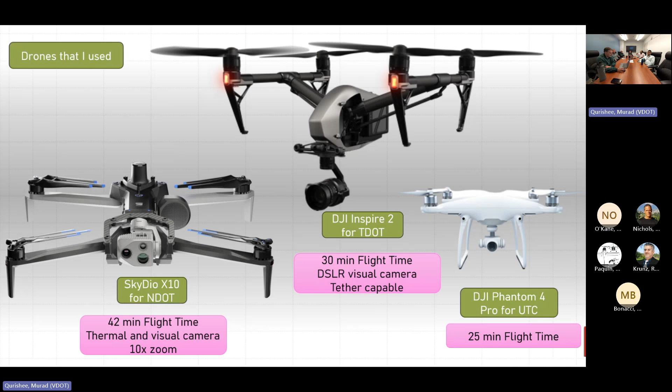We don't necessarily need to fly the drone over the traffic or crowd. We can fly the drone near to that and use the zoom.

The other drone doesn't require any pilot. It has a tether capability, also thermal, and it has a 150 foot tether cable. So in your district, if you do not have any drone pilot, you can use that.

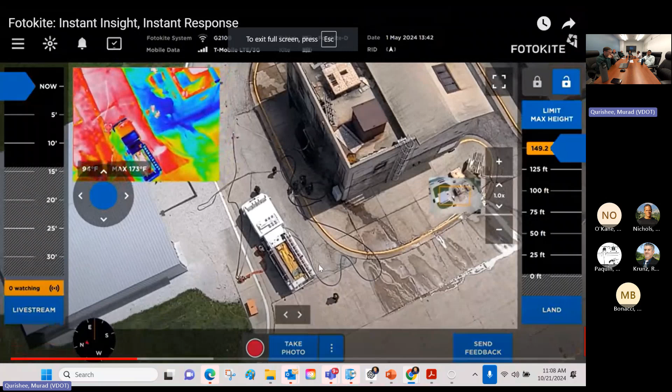Mainly in the video, you can see you put the drone here, and there's a cable. The drone can stay in the air as long as it has power. You can take the power from the car or a nearby power supply. The good thing is the drone is lightweight, so it doesn't require a pilot, and it has automatic flight and height control. So for a district office without a drone pilot, we can use that one.

The next one is ramp service interchange queue length monitoring and advanced detector placement. This is on I-24 interstate, where the traffic comes to an intersection. During peak hours, traffic blocks and there's a very long queue overspill. So we fly the drone to check how long the queue is, and based on that, we put the advanced detector so it can call with the controller and clear the traffic.

At what height were you flying the drone? The maximum height we can go is 400 feet. So I was flying here, and you can see there's a long queue. They are waiting, and during peak hours there's always a queue still.

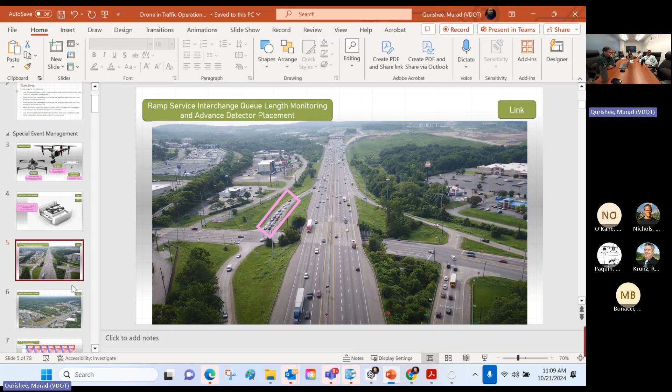The next one is traffic progression analysis along a corridor. So we retimed a corridor, and after the retiming, I flew the drone to try to see how the traffic is progressing.

Is there any blocking issue? Like this is another signal, and there's another signal, and another signal. You can see there is some blocking here.

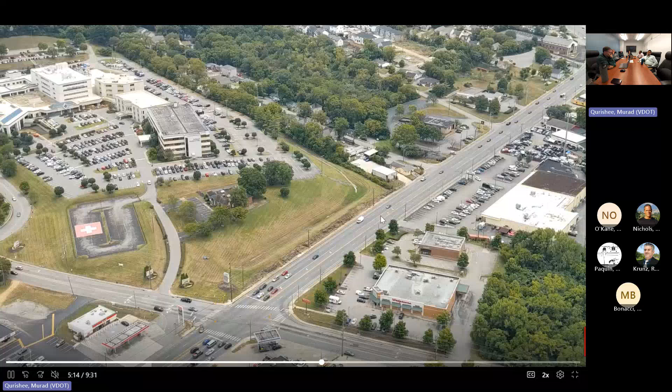So we talked with our consultant and gave them the video footage. The interesting thing is this is a major intersection, meaning this is a major arterial and this is another major arterial, so it's hard to coordinate.

Our consultant came up with a signal cycle length increment every third cycle, like a 50% time increment. For example, if we take 50 seconds for the first cycle, the next time it will be 100 seconds, and the next time 150 seconds. It will go on like that.

It will give the adjustment on both corridors, and from there you can also see we can use the drone for queue length assessment.

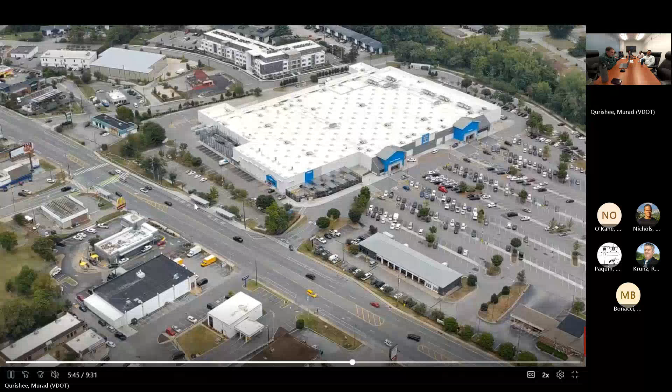Hey Murad, I think Keith's got his hand raised. I'm not sure if you can see it since you've got the presentation up. Go ahead, Keith. No, that's okay, keep going, I'll wait till the end. I didn't want to interject in the flow, so I'm sorry.

So I'm mainly observing how our signal retiming and any of the split adjustments are required.

This is another corridor here. You can see from here, trying to observe the traffic flow, and there is a queue here. So we talked with our consultant to check that queue, because the minor approach has very minor traffic there.

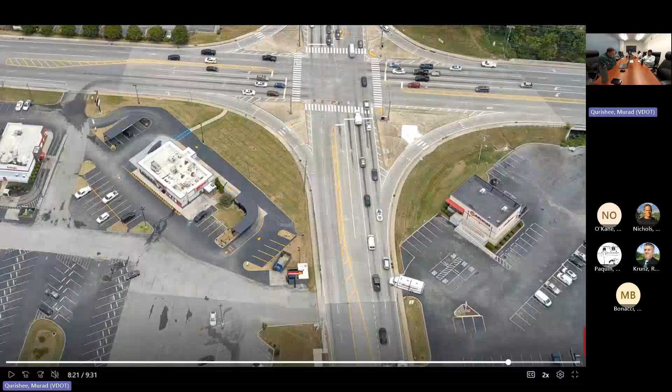Now, is this drone tethered or not? It's not tethered. Okay.

Keith, are you familiar with this? There was an experiment done several years back, prior to COVID. I remember going to see it, it was in Salem. Yeah, I'm very familiar with that whole thing and how it played out, and all the little nuances of what worked and didn't work.

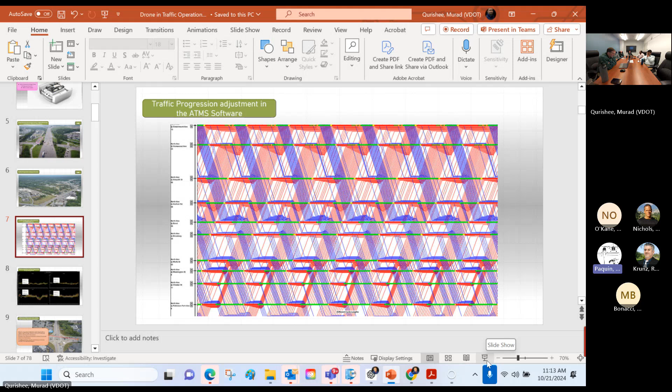This lines up great because I'm on my way to Massachusetts today to talk about this type of drones, and drones in general, with Massachusetts DOT. When I come back, they've done 5 or 6 drone traffic operations studies that kind of continued what we did earlier, either added on or branched off for drones and traffic ops.

I've seen that, 2019, I think it got published in 2019. Okay, that sounds about right. For that report, I just remember it's sitting on my desk. It was tethered.

Yeah, so the one I saw was tethered. At least the one in Salem, the way they did it, I was actually impressed with it, but I don't remember the final study. I probably read it, but don't remember what their conclusions were.

Well, the big problem with that one is, and we still have that requirement, you can't just leave a tethered drone by itself. Depending on the authority you're operating under, you're still required to have a pilot. So just because you buy a tethered drone doesn't mean the requirement to have a pilot goes away. That's kind of a big misnomer.

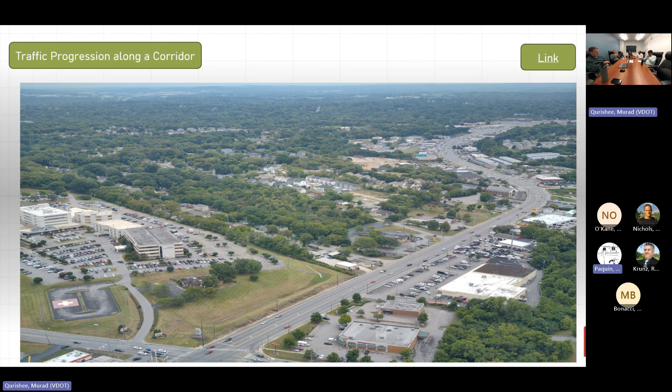I'm aware of two other studies going on in Hampton Roads, not with us. We were invited early, and I'm kind of like a tag along, if you will, on this. But I know that the police and fire down in Hampton Roads are working on getting their video feeds into the Claris system. I'll reach back out to them and see what their success rate is, so we're not duplicating effort. We might be able to fall into something that they've already done. Anyway, I'll follow up with that when I get back in town.

All right, thank you. Sorry, I have a 80 slide, and I think I need more additional time.

Okay, so after the corridor run, I checked our Centracs time-space diagram, and we adjusted different offsets where we found the blockage. After that, I used RITIS for additional data analysis. As you can see, in May 2 the speed was 10 something. In May 3 the speed increased to 16.

So it's a huge increase there, in northbound, again southbound. So although the corridor was retimed, on that major intersection it was a very hurdle for us to get through, and it's improved from there.

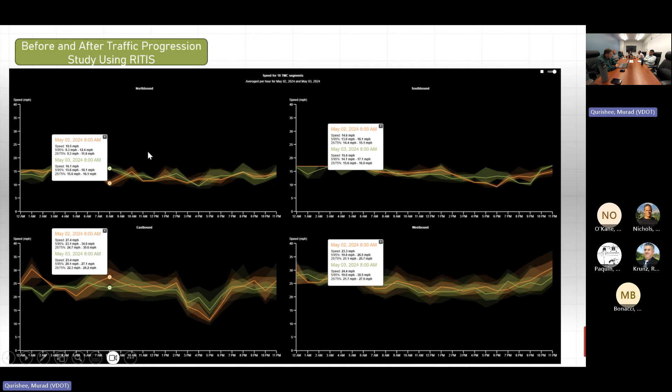And then we also did an indecision or dilemma zone study and advanced detector placement. So the general practice is that drivers usually show indecision or confusion when the yellow light change is 2.5 to 5 seconds. So we studied the corridor and put the advanced detector in a video analysis tool, and we simulated different features there.

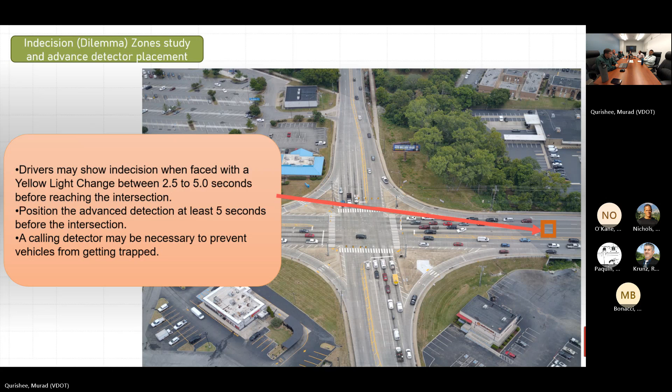And then this is the special event management. So in Nashville we have Music City, and we have a corridor called Broadway, and it gets messed up when there's something like Taylor Swift coming, and the whole city was shut down at the time. So what I did...

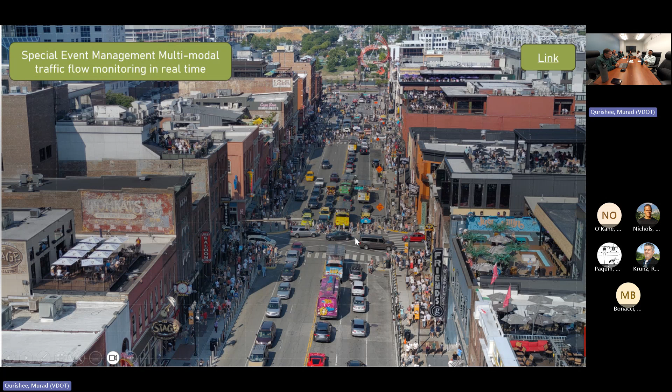So I fly the drone on there, and mainly I observe the corridor and the pedestrian, how they are crossing the intersection. Also you see there's an entertainment vehicle, so the corridor is mixed with different modes.

I mainly fly the drone to study what pedestrian gap size we need because during special events, pedestrians can come in thousands or more. How can we accommodate our pedestrian signal during that time? As you can see, people sometimes block the intersection.

The other thing is that after we capture the special event, I use a Skydio drone which also has a thermal video feature. With the thermal video, I can measure the pavement temperature. I talked with Richmond District Materials Division and they are very interested in how you can fly the drone and find real-time pavement temperature for materials testing.

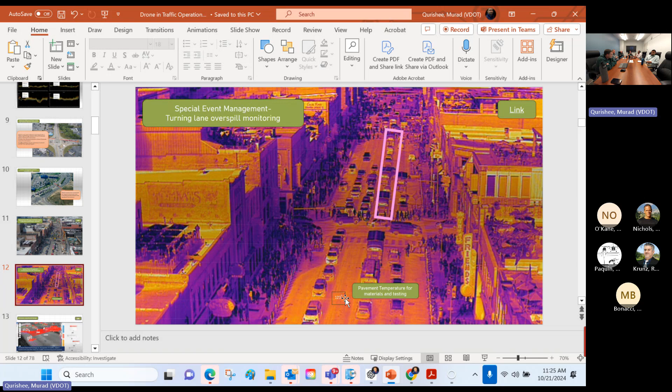Using that, you can also see that the left turn has already overspilled, and how can you adjust your signal timing to clear that? I have the video.

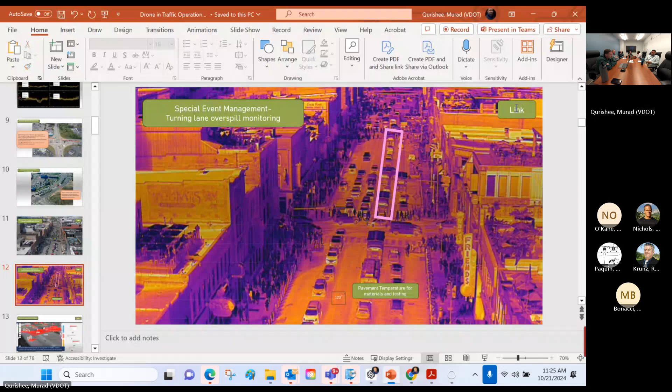The good thing is that using thermal video, if you use different analytics tools, they can capture and count pedestrians more precisely than visual methods, because thermal avoids shadows and can detect pedestrian objects more clearly than other methods.

Also, the privacy for the individual person is not disclosed, so we can use thermal if there are any concerns or privacy issues.

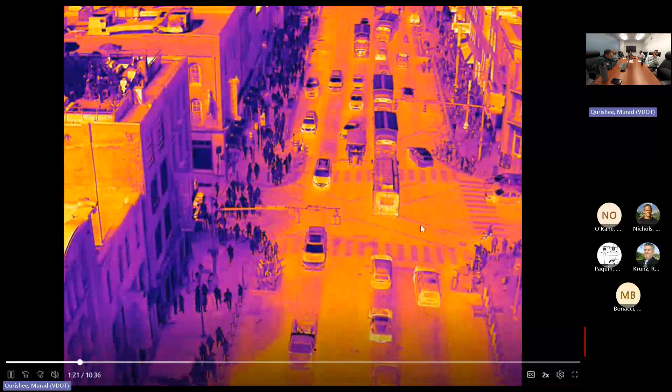There are some council members in here, so they don't want it shown that they're drinking or having some fun. Yeah, we can use that thermal video for that.

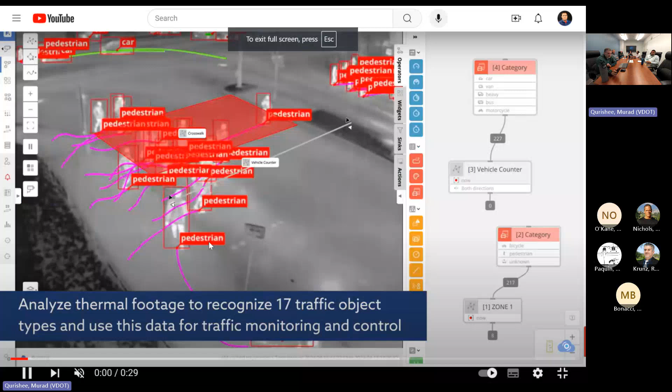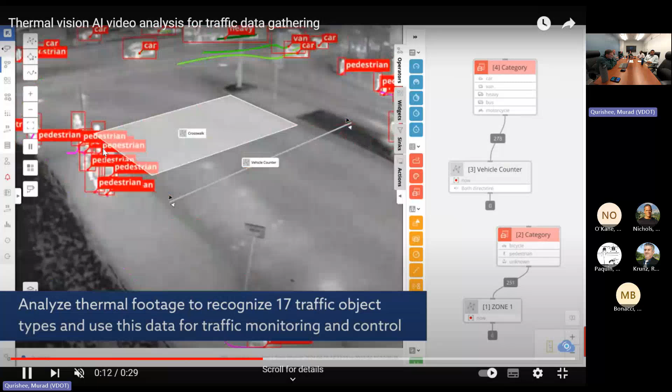We use a tool called Data from Sky. Using that, it gives us pedestrian flow data from the thermal camera, showing different pedestrian flow patterns, how they're crossing, and number of pedestrians. They have nice tools they provide in the setup.

Again, I use the drone for special event coordination with the police department. You can see the police in here. We share the feed with the police department, our TMC, our higher leadership, and also the mayor's office.

The mayor's office also observed that. They try to understand how many people come and try to adopt different measures. Police come in here and saw that this intersection is affected because we have one zone nearby that intersection.

I don't know if anybody else has seen this policy, but what came out of 2019 was our policy to support Virginia State Police. We're extremely limited about what we can and can't share coming from a drone with VSP. We're supporting VSP.

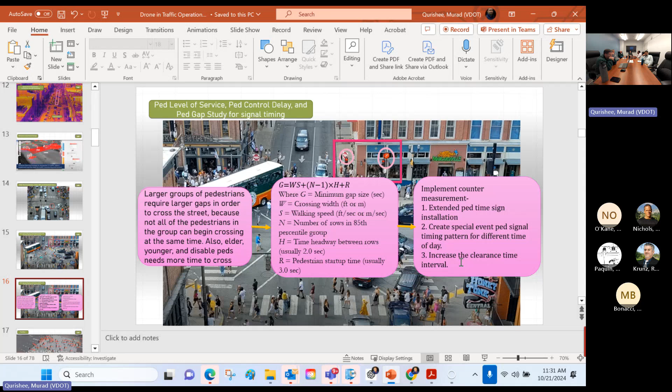Assuming you ran exclusive peds there, right? Yeah, exclusive ped, the X.

Again, as you can see in here, this is red right now, and when the pedestrian crosses, there will be no right turn on red.

The issue is that we set up a special pattern for pedestrians, but when there are lots of pedestrians or they purchase more tickets, those aren't covered. Using the drone, we try to count pedestrians and determine how much signal timing or pedestrian timing we need to implement. You can see in here, and they just cross in different ways.

You're blocking the chat. That looks like New York.

How many pedestrians an hour were you guys calculating through these? Yeah, I'm counting that on the next slide.

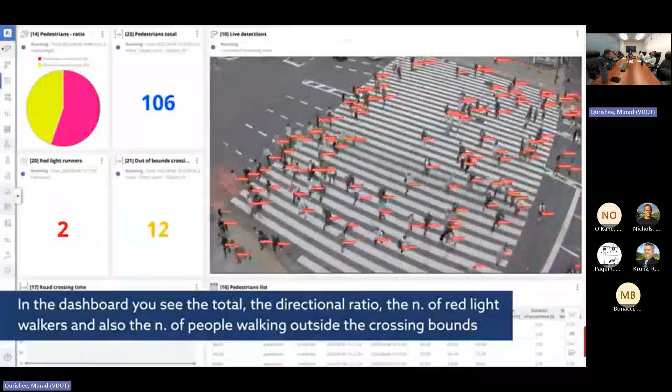So the next one is the pedestrian count using the data from Sky. When you put the video in there, data from Sky, it can count, and it also gives the pedestrian flow rate. That means per hour, how many pedestrians are going, or every 15 minutes, what is the pedestrian peak flow, so that you can count different pedestrian timing.

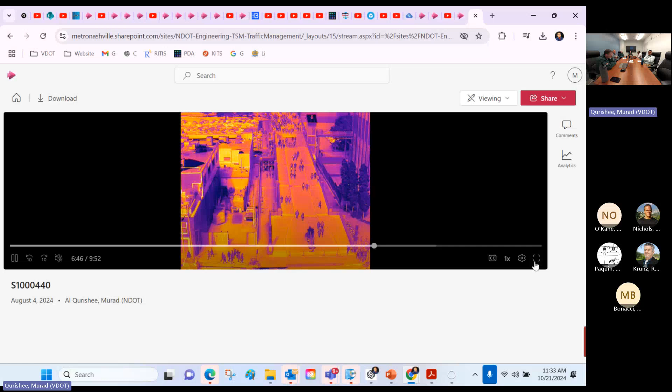And again, we also have what's called a pedestrian bridge, near the Nissan Stadium. When there is a special event happening, it's like a zombie, they are coming from different directions. You can see from there, the stadium is on that direction.

So we have mid-block crossings here, and pedestrians are crossing there, and this is the traffic. We use the drone to count how many pedestrians are using it, and in that way we know how many people attended there. So we just try to monitor different access points of that special event.

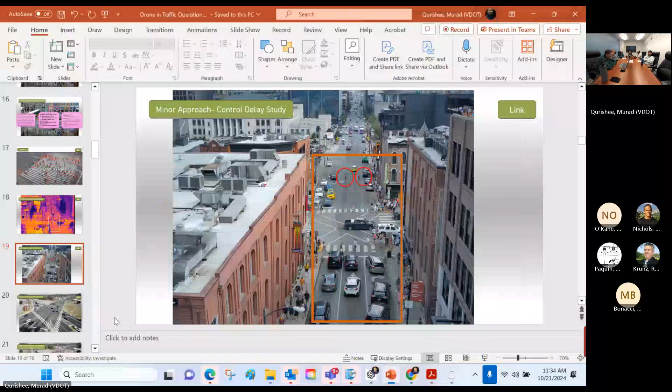The other one is control delay and turning movement count, TMC count, in there. You can see there is a rail track in there. This is the major corridor, and we need to know railroad preemption timing - if the rail is going this way, how the traffic overspills from other intersections upstream and downstream, and how the queue length is affecting our signal operations.

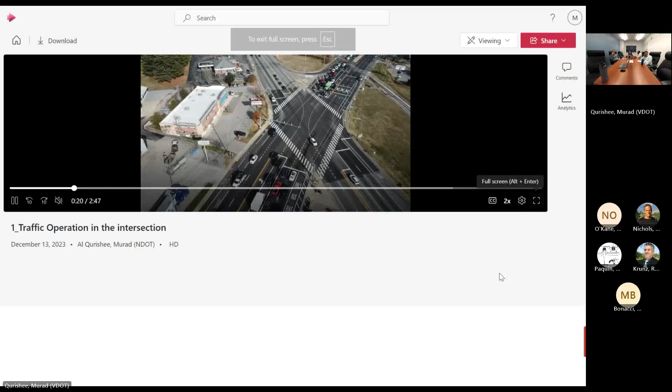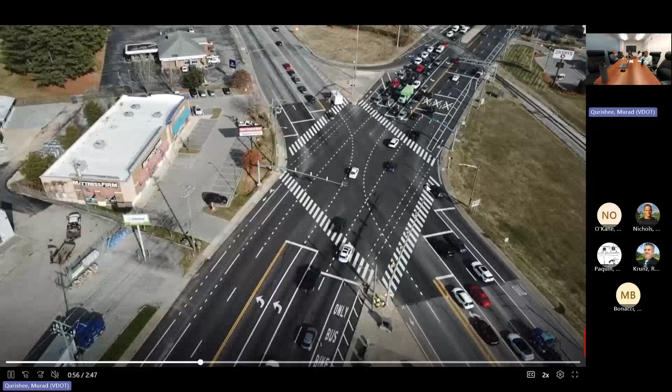You can see the queue length and the traffic in there. So people are taking left turns, and we are using video analysis to count all the turning movements here.

Also we see the rail track - unfortunately I'm not seeing it here, but using that, we can also see railroad preemptions, when the rail passes, how it is impacting other intersections, what is the queue length, and in that way you can know which phase after the rail pass should be released to minimize the queue.

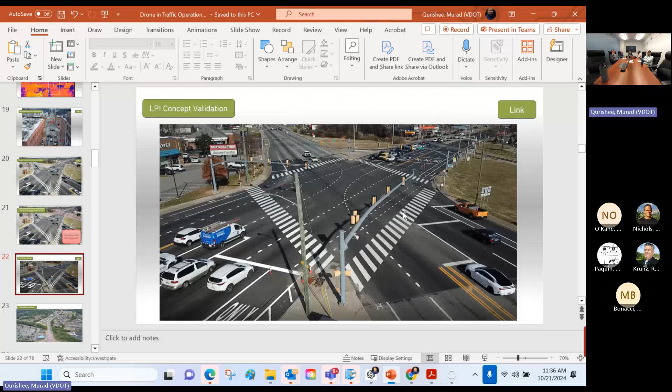And then same with this one, and also during NPI implementation we also implemented LPI, leading pedestrian interval. So after implementation, I applied the drone to try to capture how we implemented it, in a good way or bad way. So I found that when people - this right turner, you see - although it is red, they feel that they can move in there.

So this pedestrian is waiting to cross. When he starts walking, you will see that this car almost thought that he could cross, so he had to brake hard. If it is during nighttime with low visibility, especially if you have rain, LPI could sometimes be dangerous. So what we posted here is a no right turn on red sign. That's a good indication.

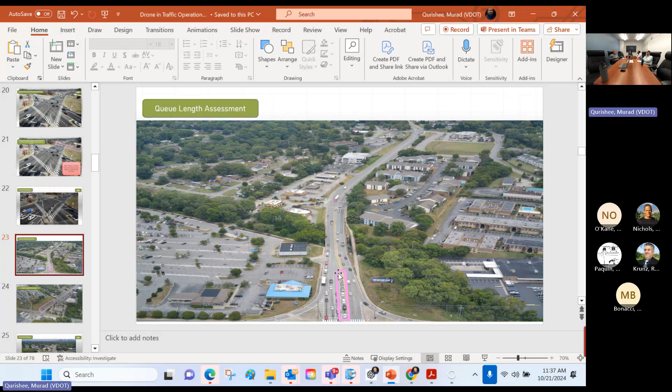And then again, queue length management assessment. We study different overspill queue lengths on the corridor. Similarly for this one, and we also know how many vehicles are there.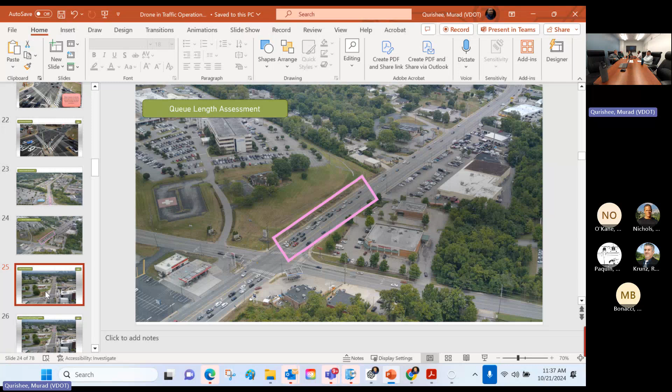And then we also did LiDAR installation, 12 LiDAR units. There was a fatal crash at that location during midnight - drunk people were crossing, there is a store in here, so they crossed and got hit and were killed.

I used the drone to fly the whole corridor and tried to capture different condition diagrams for crash assessment. Condition diagram is what traffic signs and infrastructure are there, and it helps to identify the crash reason.

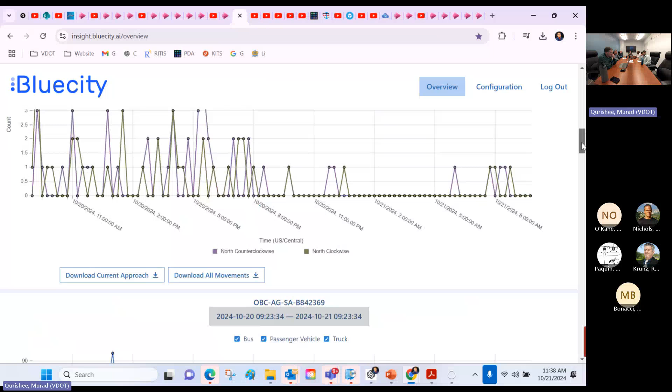And then after that, we used Bluecity, the LiDAR software. Bluecity, we analyze the data at that location - here is the location. Using Bluecity we count how many traffics are there and what are the outside-of-crosswalk events happening, meaning the number of pedestrians that are not using the crosswalk, they are using mid-block.

For one month of data, we found out that most of the pedestrians are crossing this way because there is the facility in here, and this way.

So later, I was the project manager. We installed the mid-block here with appropriate signage and a rapid flashing beacon. So when LiDAR detects a pedestrian, it gives the flashing so the driver can be aware of that. So that's another way we can use the drone for condition assessment.

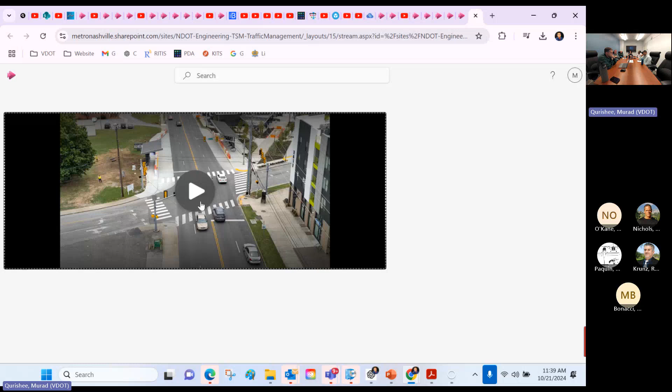Also, we use a drone for LiDAR data accuracy validation. So here I'm flying the drone here, and the LiDAR is in here.

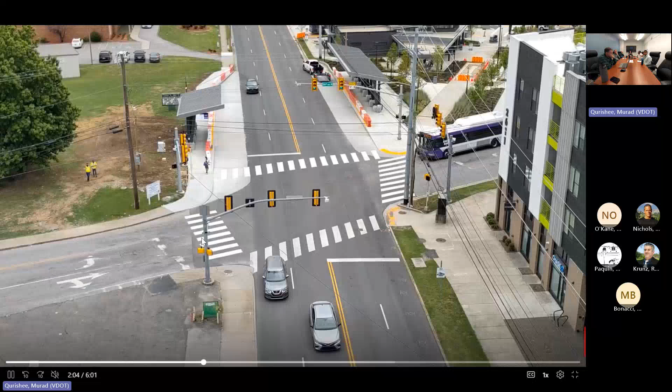So the pedestrian is crossing here, and the LiDAR is in here and here, and you can see there is a flasher. When the pedestrian touches the crosswalk, the LiDAR detects the pedestrian and starts activating the flasher here. You can see the flasher turn on and start flashing on both sides.

We also use that video and match the timestamp with the LiDAR output and drone output to validate the data accuracy. The signal was green during that time, when the pedestrian crossed the signal was green, but only the flasher is going on, so we need to check on that.

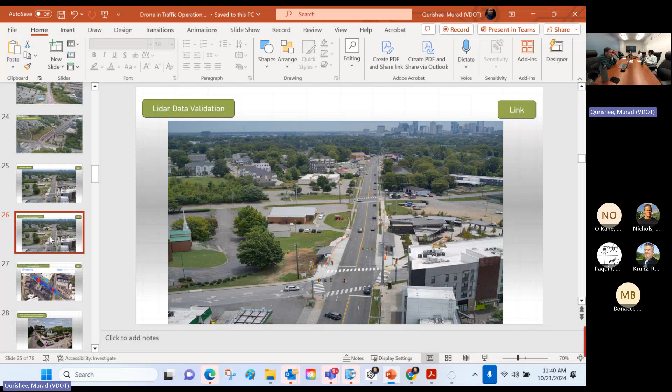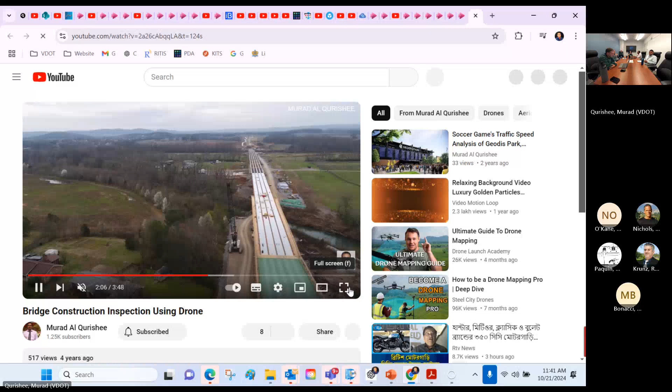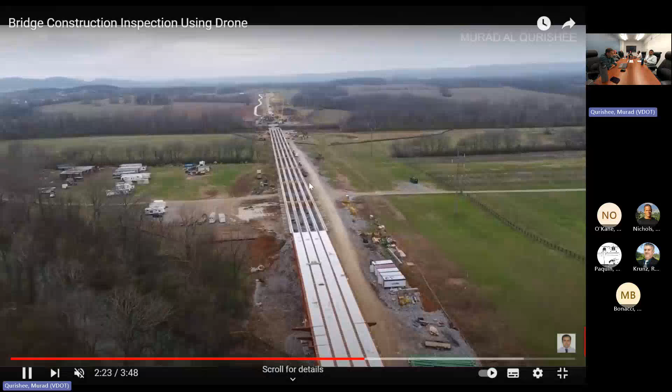This one is the construction project update. I used the drone for the TDOT public department. Mainly the commissioner wants an update on the bridge construction, what is happening there. I fly the drone and give nice footage so they know the construction status. This can be done every week, I can take a flight weekly or monthly so they can get updated on how long the bridge is.

This one is also interesting. We used the drone for I-24 camera installation, so you'll see me here.

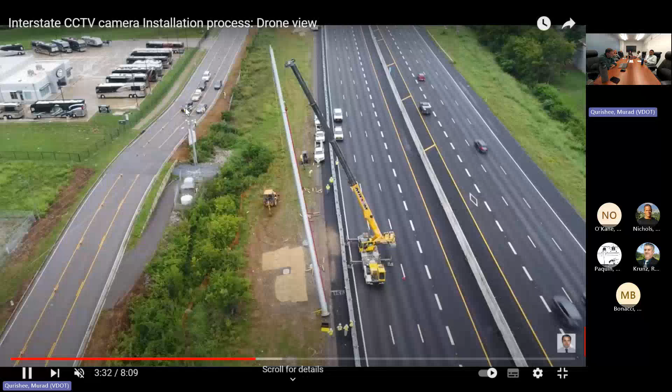When we put the crane here, we closed 2 lanes, and when we started putting this camera pole in, we closed the whole lane. On the downside of that road, there's police on there, they shut down the road. So we use the drone to share the feed with them so they know when construction starts, they shut down 4 lanes, and it gives a good understanding of when we should shut down 4 lanes or 2 lanes, so that it minimizes user delay cost.

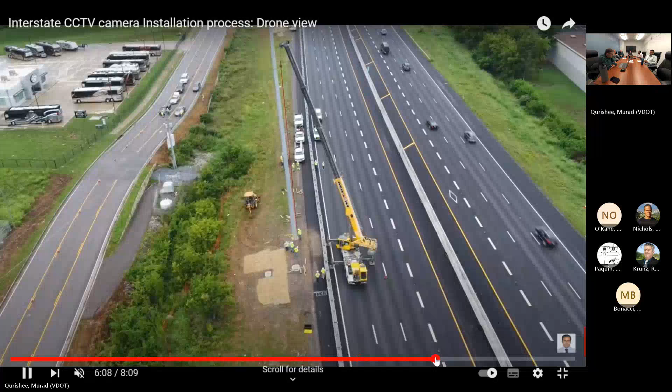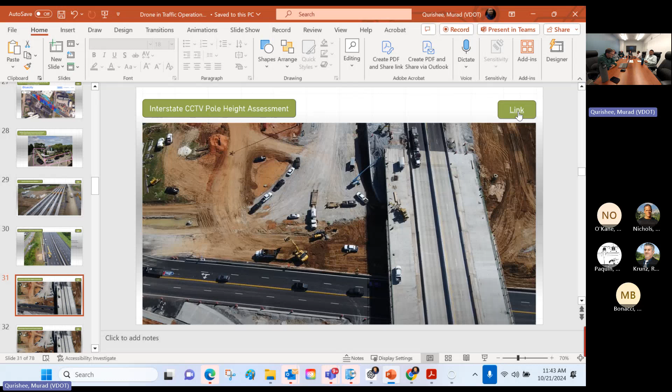Next one is the interstate CCTV pole height assessment. I did it for VDOT. Before installing CCTV, we try to understand which height is suitable for the CCTV - is it 80 feet, 60 feet, or something else.

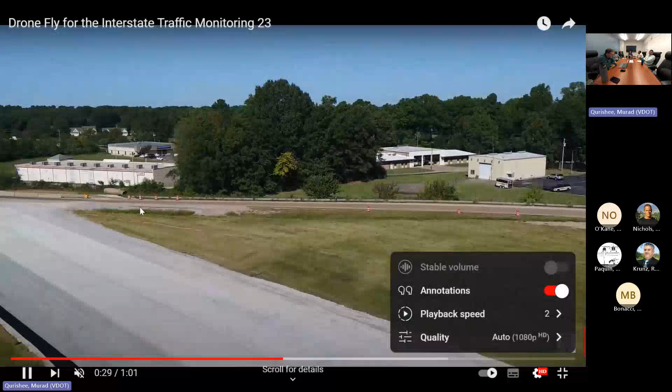Or if we choose some location, if there are any nearby signs or trees that block our view, so we give an assessment of what coverage we'd get if we put the CCTV here, looking at the roadway, minor street, and interstate. So you fly the drone at the approximate location of where the 80 feet CCTV would be, and then adjust it to see. So at 80 feet, 60 feet, 100 feet, we try to see what the coverage is.

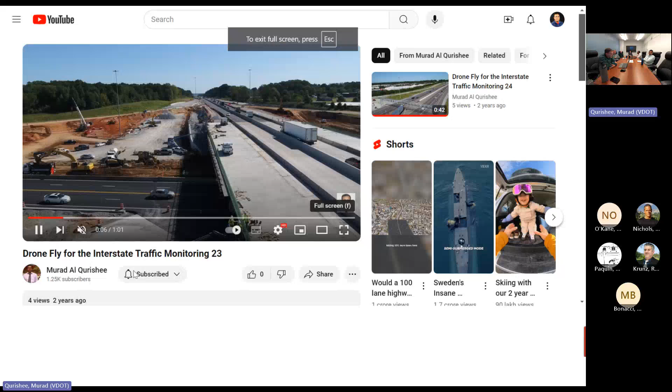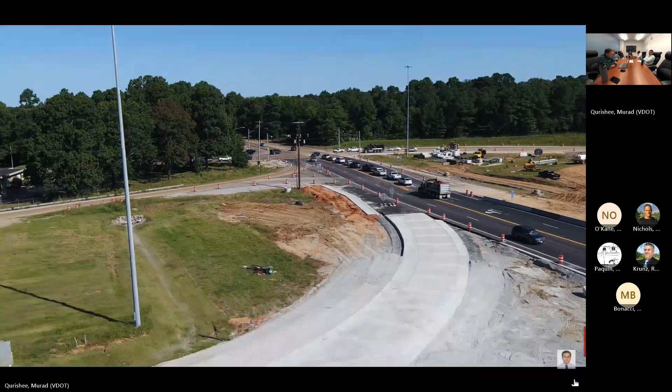Again, you see there's construction happening there, so we captured the construction and did some Streetlight traffic analysis on how it's impacting. There's an intersection here, so we looked at how it's impacting there, there's a long queue, so we did that with Streetlight.

Using Streetlight, we did a deep dive analysis on how the work zone impacted our traffic operations and what the speed of traffic was, and we can validate that with the drone data. We also made a 3D drone mapping for that construction zone to analyze it further.

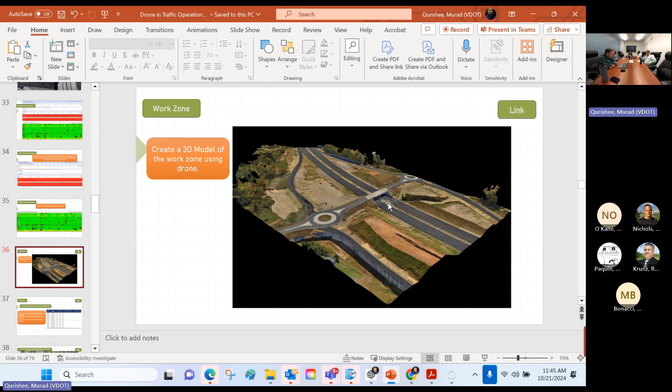This is the 3D drone map for that work zone. Using that 3D drone map, you can measure any types of pavement characteristics, different taper lengths, what the merging taper or shifting taper or different properties of the work zone are.

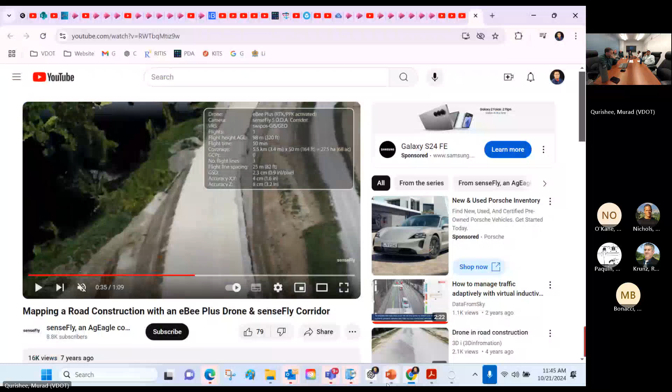Using the 3D model, we also did some experimental volume input into the VISTRO VISSIM model. Using different scenarios, we created scenarios for traffic on that work zone, like 30% trucks, 15% trucks, 5% trucks, and analyzed it at different times of day, trying to identify, because of the work zone, what is the worst or good traffic signal management there.

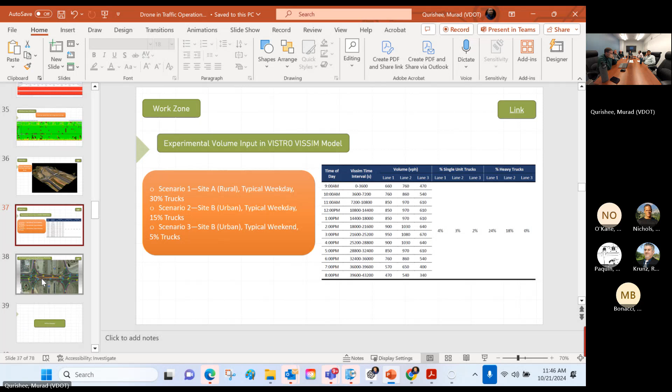This next one I didn't do, but it's mainly about the DDI - you can monitor the DDI signal, traffic signal, and traffic queue length on the DDI. It mainly shows, if there's a signal here and here, how can you operate it, how can you manage different queue lengths. Having drone footage gives you a better understanding to operate the DDI. I think the Salem district has one DDI - yeah, we have several across the state.

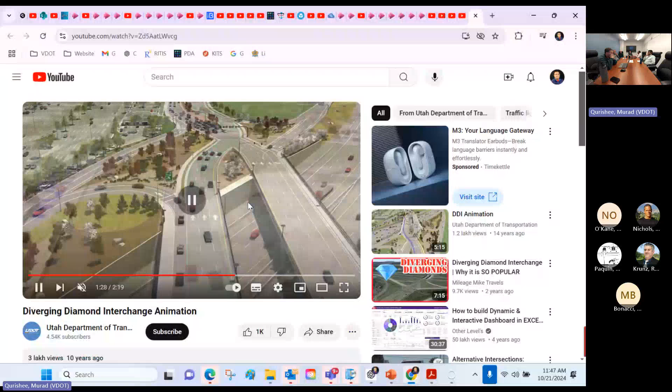And then 3D drone mapping again - using that drone, we can also go for accident reconstruction with the 3D mapping.

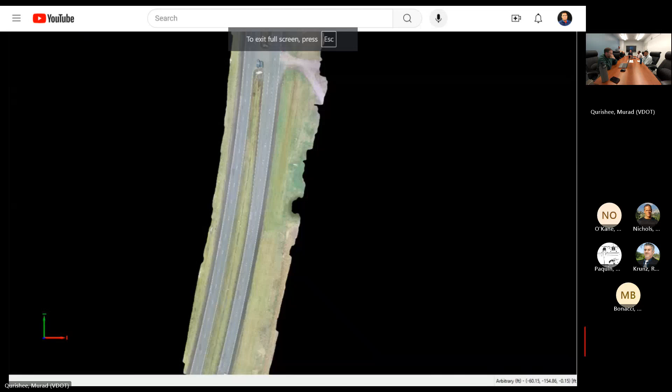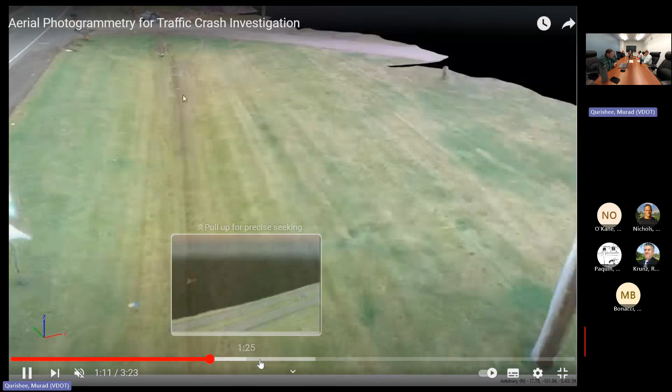So using the 3D map, you can investigate the accident and you have the ability to measure different features of the crash, like nearby drainage facility, and why it happened.

So this is the 3D mapping there. So they try to understand what is happening, and they also share this footage with their insurance provider.

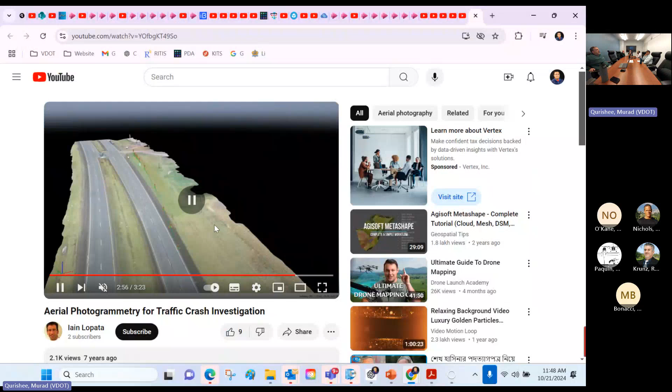Something like that may be very valuable because I assume the rest of the state still does fatal reviews. I know when I was in Salem, Brett Randolph's group would go out and review every fatal that would happen in the district. So to be able to get a shot from an aerial view of something like that would probably be very valuable.

They can use the drone, and Florida actually uses it - when I was there, they were using the drone for any lane blockage and fatal accident crashes too. So they fly the drone and see how long the queue is, and what is happening at the actual scene too. They share the feed with the TMC, so we're in the TMC and the pilot was in the field.

As of right now, we're letting the VSP handle those in the field case, and then we get the data back from them after the fact. That's not something we're actively pursuing as a case right now - we might go back and look at it after they move the car, like what our consultants are providing. But that investigation piece right now, the collection piece for the accident reconstruction, is being handled by the VSP for us.

Yeah, so using the drone, we can monitor the hazmat overspill and how the queue is forming near the interstate, and based on that, we can do the signal timing to clear the queue.

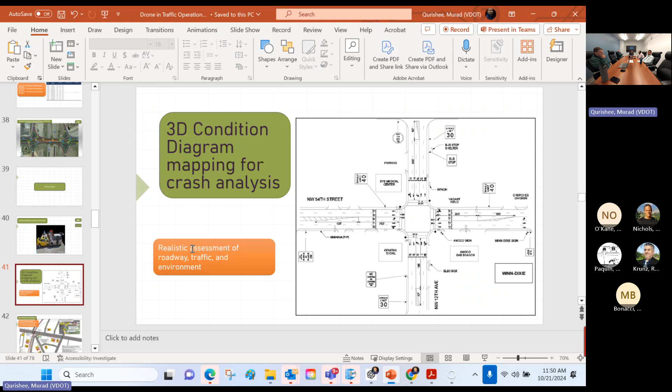And then again, using the drone, we can do the condition diagram for crash assessment. This gives us a realistic assessment of roadway, traffic, and environment.

And then if there is a railroad, a work zone, and a pedestrian facility, using the drone you can study the full corridor and understand different complex scenarios. Like this is a really complex scenario - if rail is coming in there and there's construction, this is the worst case. So using that, you can fly the drone and see how it can impact operations.

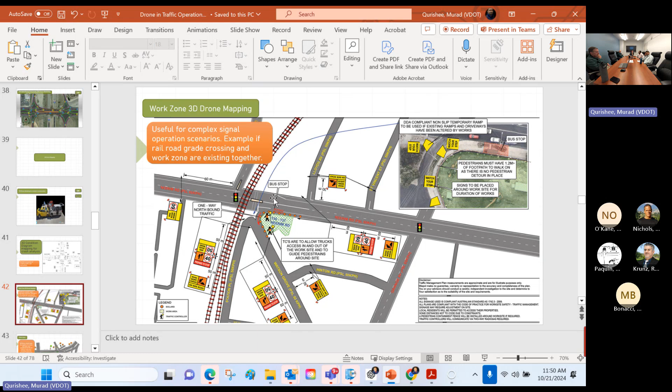And then also for the work zone, we can make 3D drone mapping and analyze different taper lengths - where we need to place it and how it's impacting our traffic operations. Again, for the work zone, we can estimate downstream taper, shifting taper, like 45 feet, and we can validate queue length impact.

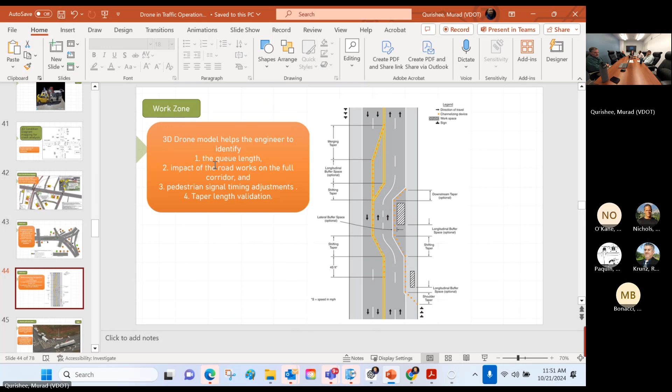All right, so the other one is Data from Sky. It's really good for data analysis, and actually VDOT bought one unit last year. Mr. Ray Gire and John Paul, they have their tools. The good thing is these tools give us real-time data, and it has data capability - also I think a generator unit in there.

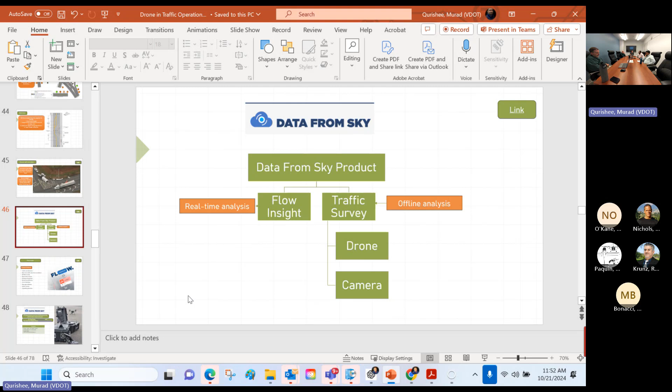So Data from Sky has two products, one for real time, another for offline. The real time product is called Flow Insight, and the offline one is called Traffic Survey. Using the traffic survey, you can put in drone video or video from any camera. Their product features include jam detection, real-time traffic data, roundabout and origin-destination study, safety study, parking management study, wrong way detection, U-turn detection, stop sign violation, and jaywalking detection.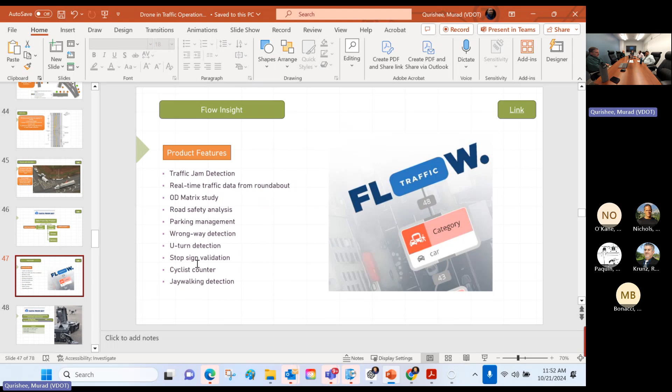It's a lot. So I put together a different slide on how we can use Data from Sky for our signal split adjustment. I have a video, but I think I don't have much time.

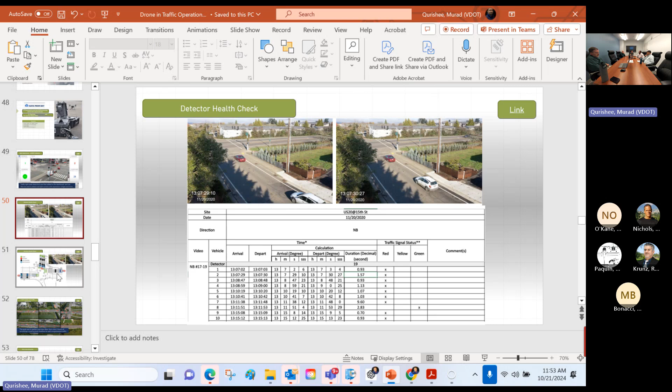Again, we can also use Data from Sky for detector health checks, like if the detector is working or not, and different detector health checks based on that - there's some report on there.

Also, using Data from Sky, they fly 6 different drones in 6 different segments of the interstate to cover a 2-mile stretch of light traffic, and they give that type of tools. We can also use Data from Sky for near miss detection.

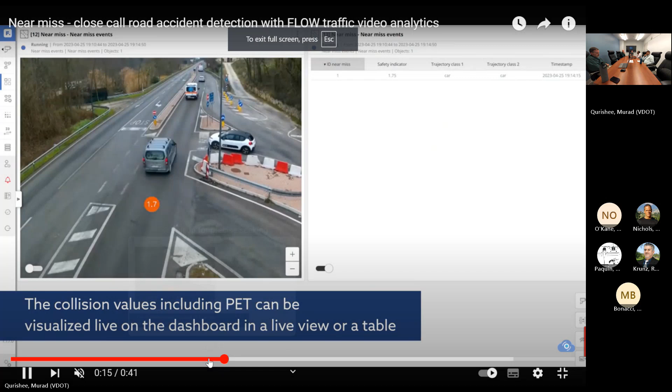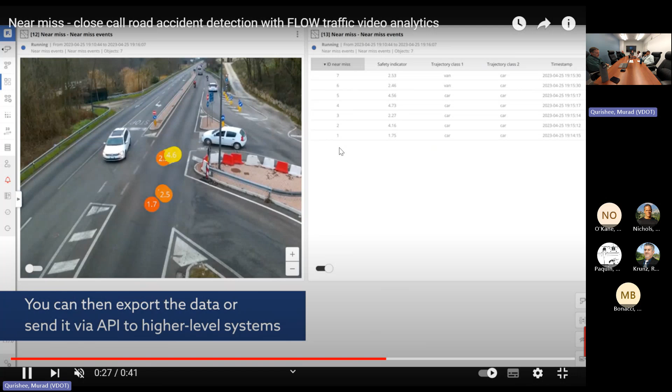So you can see that it gives some near miss detections. You need to put some kind of trajectory data on there, and it started tracking different near miss objects in the air.

And then also you can do U-turn detections. So sometimes we put no U-turn signs on our intersections, but people do not obey. We can also see how many violations are occurring and how we can minimize it. Their platform gives different information - you can draw trajectory data, different gates, recorded gates, and put some logical statements. They can track how many people are doing the U-turn.

And then stop sign violations. They have a pedestrian and bicycle counter. You can put different types of bar in here, so whoever crosses this bar, they can count the pedestrian.

Like this one, they put a bar in here, and whoever crosses, they detect that this is a pedestrian, this is a bicycle, and they give the counting.

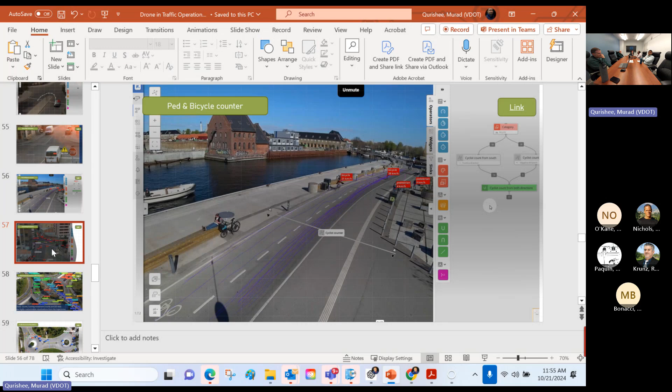Then also for jaywalking detection - people jaywalk in there, you can put different types of regions in here to detect the jaywalking. And then also multi-level intersection monitoring for the traffic roundabout. You can also count their speed, observe different types of vehicles like cars, and monitor different gates.

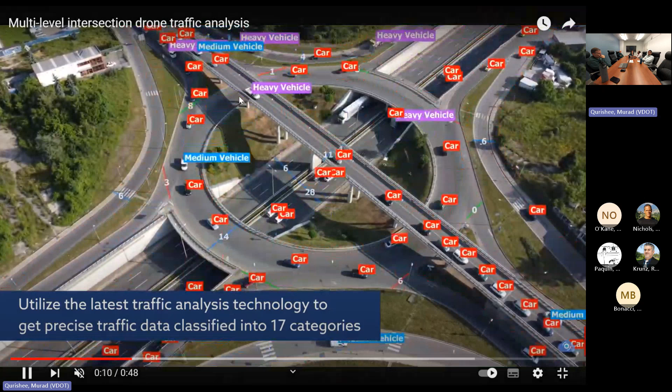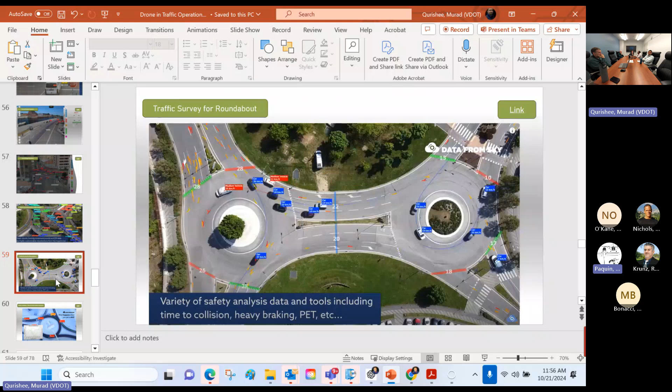So this is all data from the sky. Also, the bad news is we're not authorized to use that software.

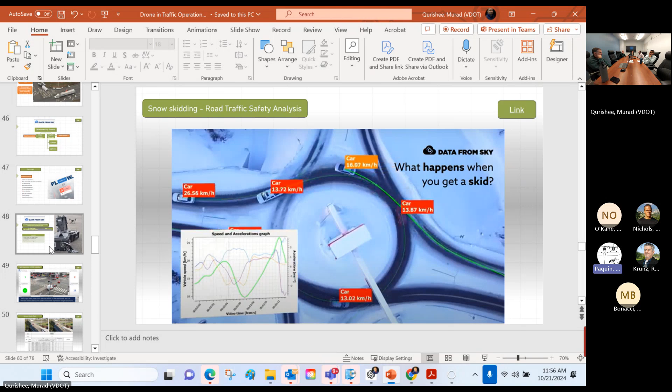It doesn't meet cybersecurity requirements unless you guys have it. I haven't been authorized to get it through the state VITA for VDOT to use, so unless you guys have a mechanism that I don't have access to, which would be great, we can't get it approved.

So I talked with Data from Sky, and they told me that last year Reg, Vire, and John already bought their unit and subscribed, but they belong to the Research Council, so they fall under the college and university system for Virginia Tech. They're not part of the DOT, so their cybersecurity requirements are not subject to the same requirements that we are. We're not authorized to use anything that goes to the cloud.

So they could do it - they could use that system for research studies and whatnot. Doesn't necessarily mean we're going to be able to bring it into VDOT and use it as part of production.

And we ran into that with the software that the traffic operations study used in 2019 - had the same problem. They used software that was available that did not meet the VITA state cyber requirements. We could not bring some of their results into our operations.

So they get a lot from VT - the Virginia Tech Transportation Institute falls under the college and university system. They're allowed to do a lot of things under research and development that we're not authorized to do in the mainstream. So that's why I was asking, do you guys at Traffic Ops have access to this?

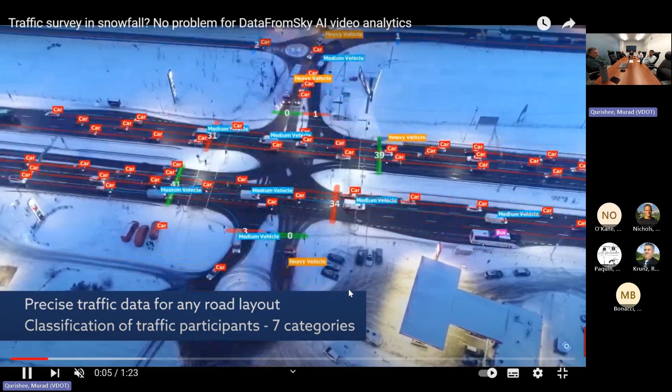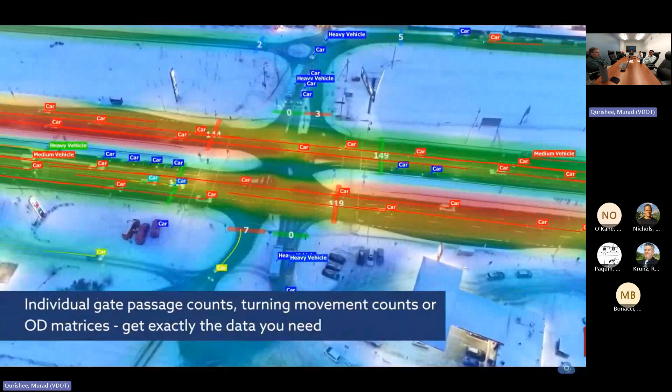No, and what you're talking about is any type of cloud hosted environment that's outside of VDOT's network. Correct. We usually have to go through a COV ramp process, and we're trying to figure out that process as we speak, with a lot of other technology that we're utilizing - like signal detection, where information collected from our roads and traffic control signals gets sent to a hosted system outside of our network. So it's not impossible, but we're still trying to figure that process out at this point in time.

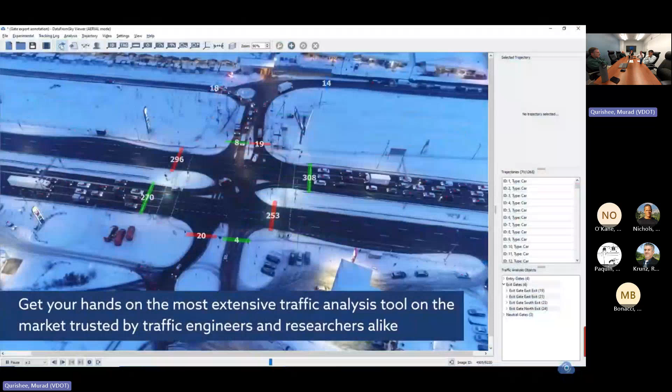So, and design - hopefully together we can break through that. And a lot of this too is with our program, yes we're interested in the innovation and technology that's out there, but also with these proprietary types of systems, at what cost do we get that information where maybe we already have that information somewhere else, or can collect it in a different way that gets us 80 or 90% there. But that's a whole other evaluation process that we're trying to look at at the same time.

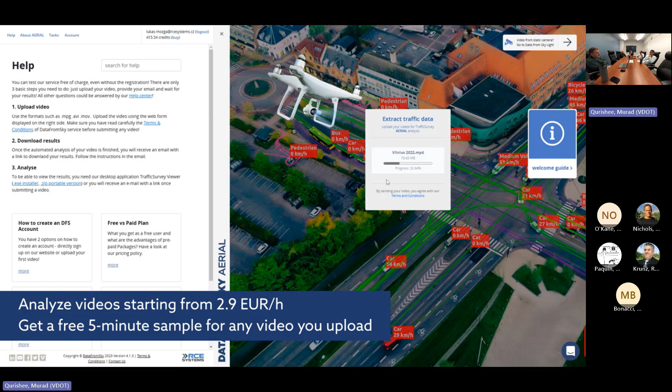So, with it being 12 o'clock, I want to be respectful of everybody's time. Keith, Nathan, Andrew, I just kind of wanted to get your guys' thoughts again. I just wanted Murad to give us a taste of some of his experiences and some of the things he's touched on with drones. But I think there's a lot of potential here from the traffic signal side of the world with these. I just wanted to get your thoughts on what this may look like as we try to move forward. Well, yeah, so, I mean, real quick.